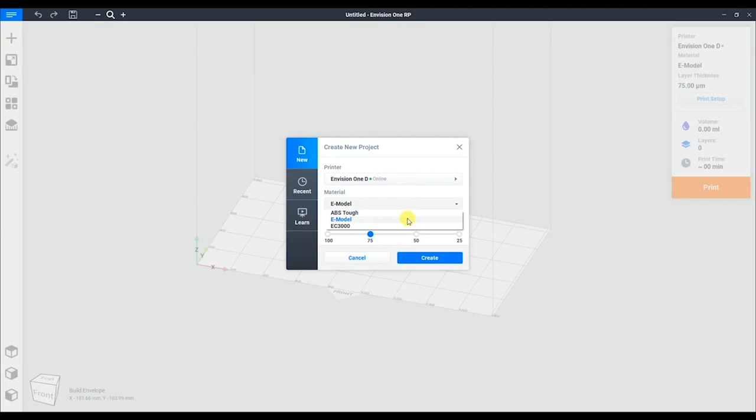Start off, we'll be creating a new project. Here we'll be selecting our printer, material, and preferred layer thickness.

This is our build envelope, where we will lay out all our parts. Scrolling the mouse wheel allows us to zoom, while right-clicking and dragging rotates.

In the upper left corner we have our Options tab. This is where we can create new projects or change preferences. To load a model, we press the plus icon and load the desired model.

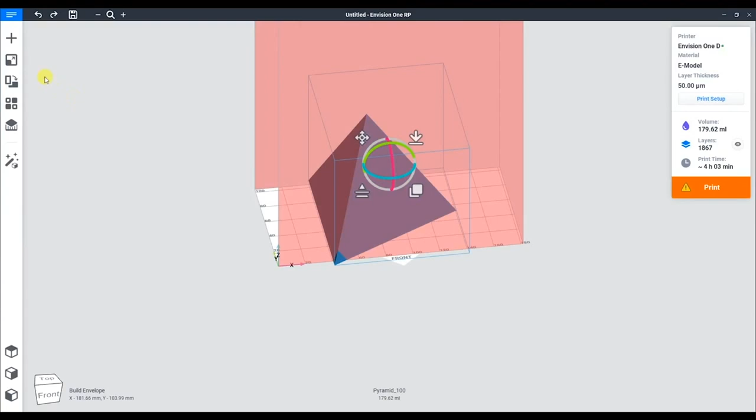Now, it doesn't really fit on the platform, so to play around with this part, we can resize it with this tool. We can resize it to a certain percentage, so in this case we'll do 30%.

Now it fits. Using the compass in the upper left corner, we can translate the part across the platform. With this option, we can rotate the part, snapping by 90 degrees or setting specific angles.

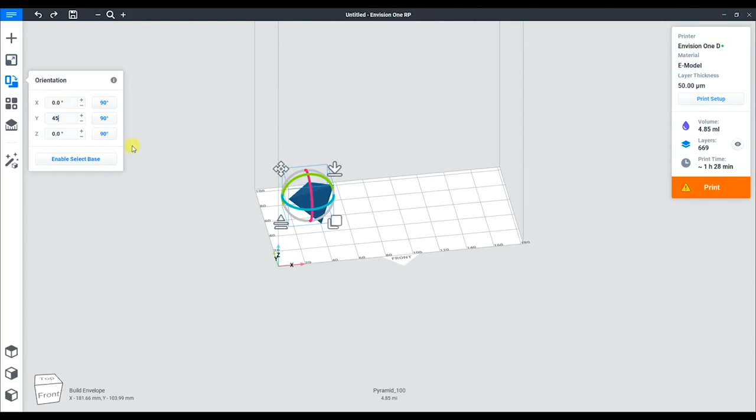Now, it's not perfectly flat, so it's not very buildable. If we enable Select Base, we can select which surface we want as our bottom plane.

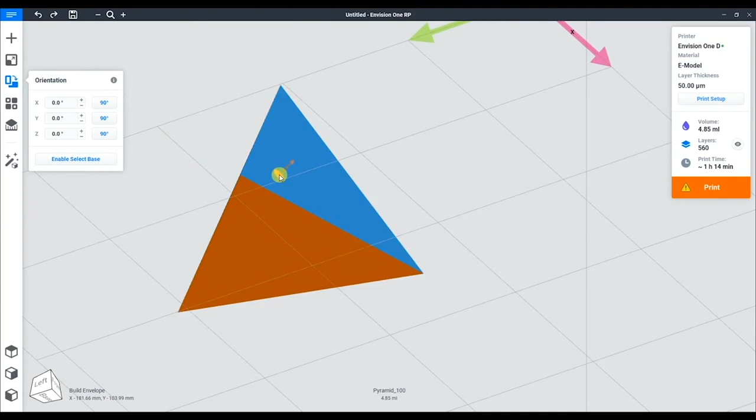Once we disable it, the upper right corner option does the same thing. Now it's buildable.

But if we want more, we can make copies. Using the bottom right option and dragging allows us to create additional copies. Now we have two perfectly flat parts.

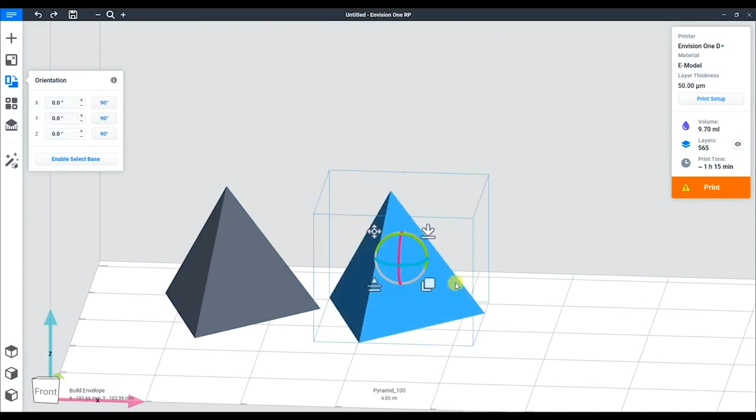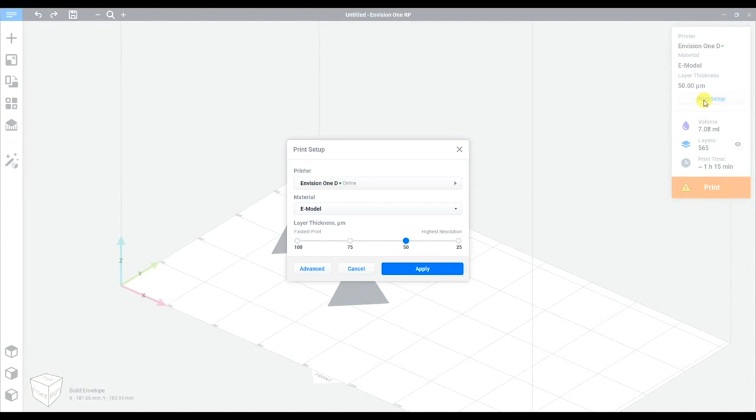In the upper right corner, we have the print setup. This is the same window that we saw at the beginning, and this allows us to change the printer, material, and layer thickness on the fly.

Below that is the layer slicer. This will take the part and create a layer by layer preview of the printing process. Again, it's the little eyeball icon.

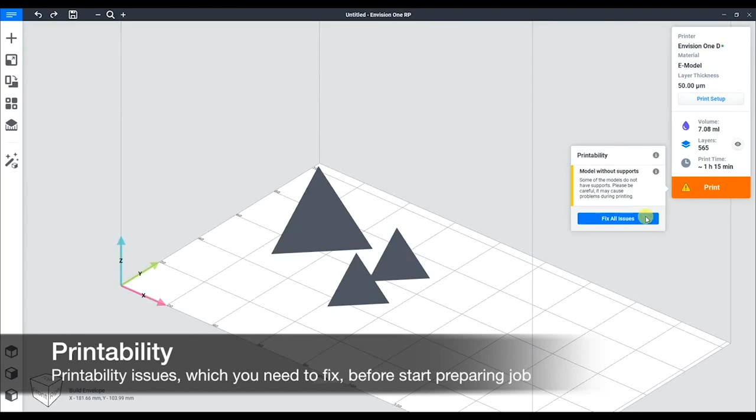Next, we're ready to print. You see we're getting an error stating we don't have supports. Now if we hit the Fix button, it will add supports.

Typically flat bottom parts are fine to print, but some parts may not have one. Now they're a little close together, so using the auto placement tool, we can space them out a bit. In this case, we set spacing at 2.5 millimeters. We can increase this to whatever we want.

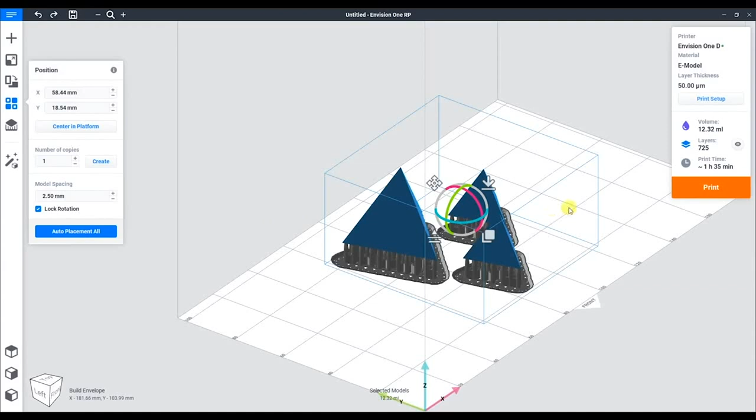Now time to print. Here we can change the job name to whatever we want. In this case, we'll call it Job 4.

Our printer is selected, so we can just send the job straight to the printer. It will begin slicing the 3D object layer by layer. This may take time depending on the size of the part.

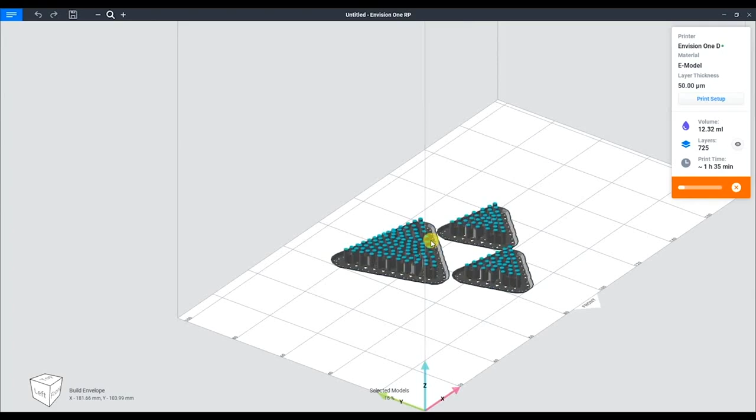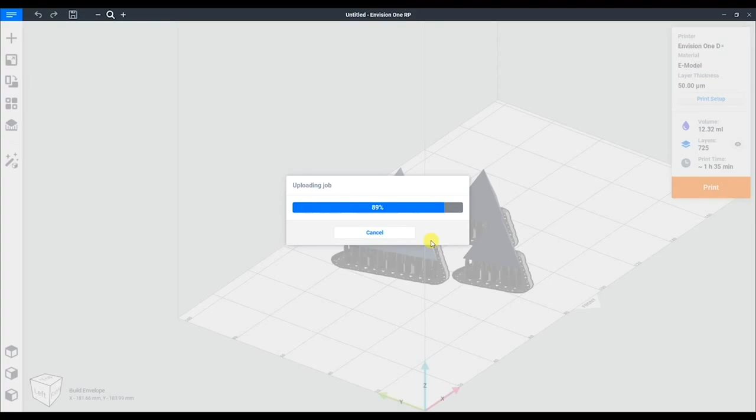After that, it will begin the process of uploading. This may take time, depending on the speed of the network. The upload is complete and we can get printing.